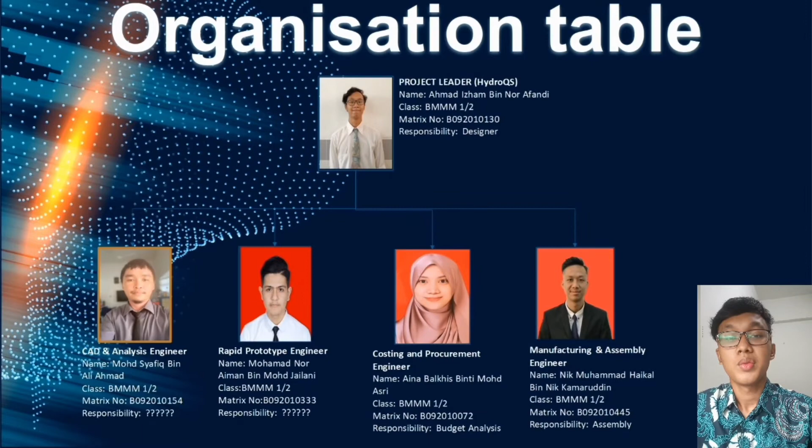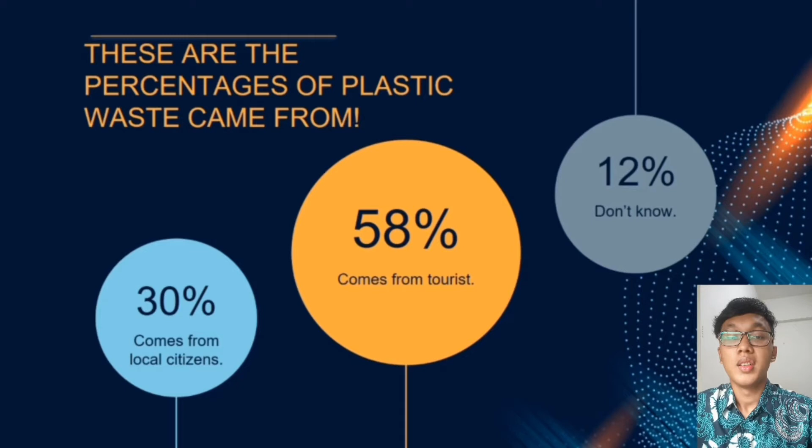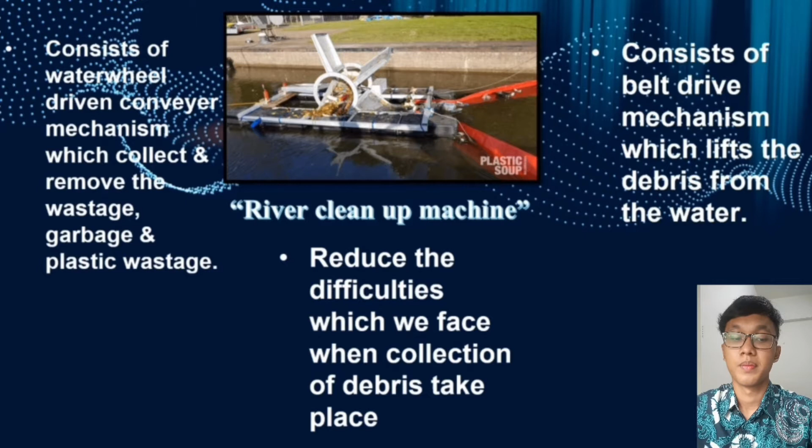Among all these 4 product designs, we have come to a conclusion to choose the best of these 4 designs, and we have chosen river cleaner as our main product. For the next part, which is comparison of these 4 products, we will continue with one of my team members, Nik Muhammad Haikal.

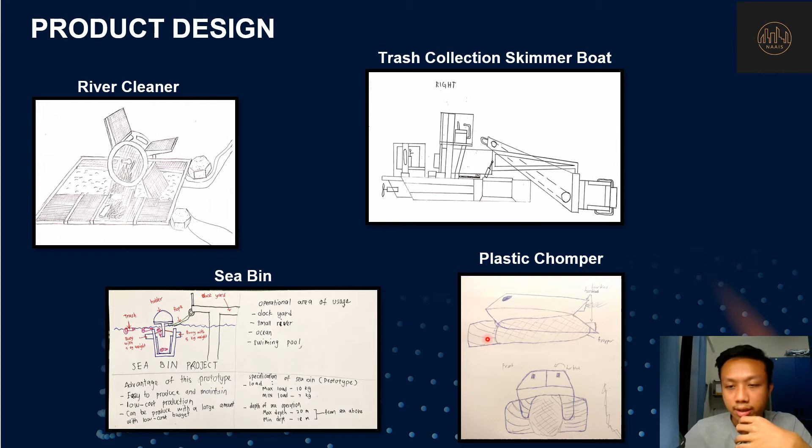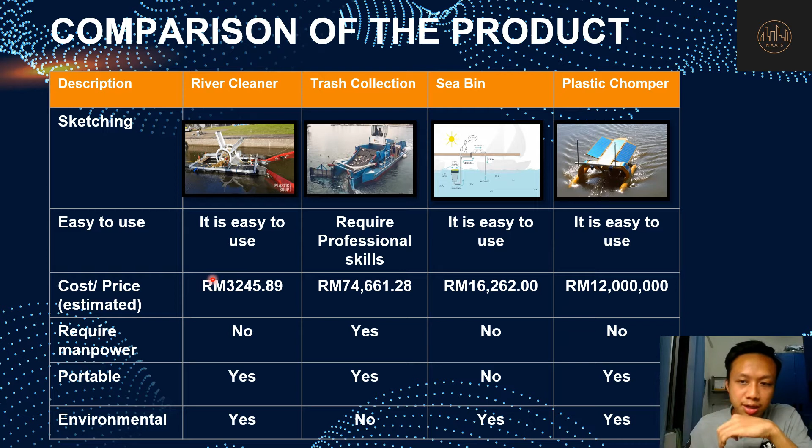For the next part is estimated cost price that we found from Google. For the river cleaner, the price is RM 3,245. For the trash collection, it's RM 74,661. For the sea bin, it's RM 16,262, and the last one, plastic chomper, is RM 12 million.

For the next description is require manpower. For the river cleaner, it's no, trash collection is yes, sea bin is no, plastic chomper is no. For portable: river cleaner is yes, trash collection is yes, sea bin is no, plastic chomper is yes.

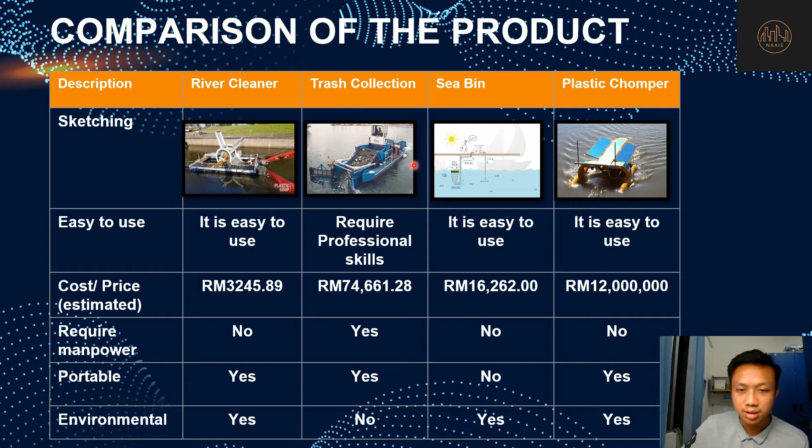For the last description, environmental: river cleaner is yes, trash collection is no, sea bin is yes, and the last one, plastic chomper, is yes.

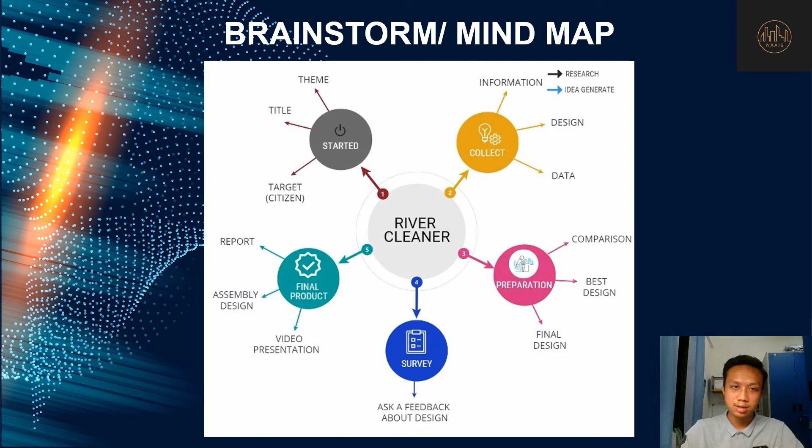For the first one is started, we have theme, title, and target. For the second one is collect, which is how we get the idea, which is information from the internet, design, and data. For the third one is preparation, which is comparison, best design, and final design.

The fourth one is survey, where we ask the survey from the citizens. And the last one is final product, which is we must do a report, video presentation, and assemble design.

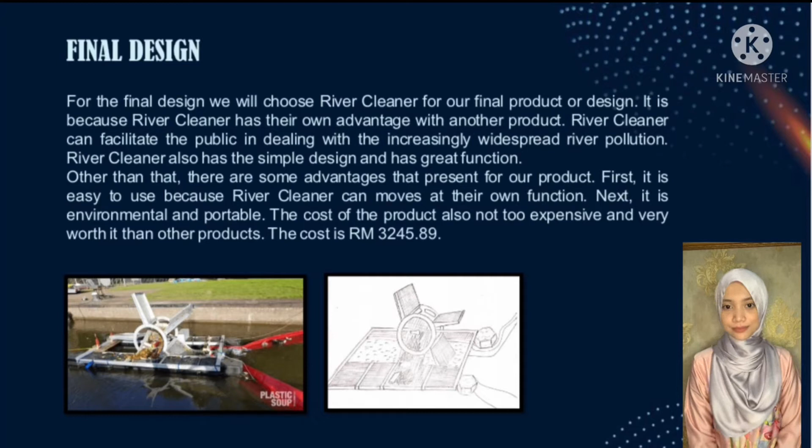In order to ensure the success of this project, we have conducted a survey for society to discover more about the situation at the Melaka River, and the survey included some questions. The first question for the survey asked about the work status.

The pie chart revealed that 71% of respondents had visited the Melaka River, which could be due to the fact that Melaka River is a popular attraction. Meanwhile, 19.4% of those who responded said that they had never visited the Melaka River.

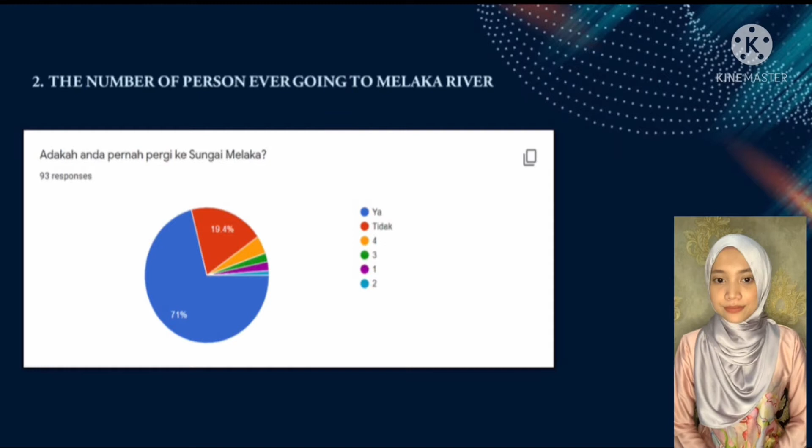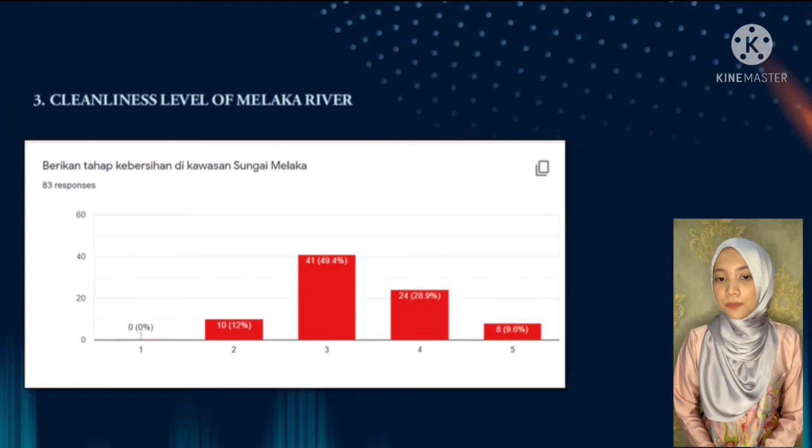The Melaka River's cleanliness is the focus of the next question. Based on the represented graph, we can see that the majority of respondents chose average for Melaka River cleanliness. However, 28.9% of respondents chose scale 4 and 9.6% chose scale 5. This reveals that some people believe that the cleanliness of Melaka River is not up to standard.

The next question is about the level of awareness of water river pollution, and the majority of respondents answered average, as much as 61.7%, with the lowest at 7.4%, and the answer of highest degree of knowledge is as much as 30.9%. It's very worrying that 7.4% of respondents answered that they have a low level of awareness regarding water river pollution.

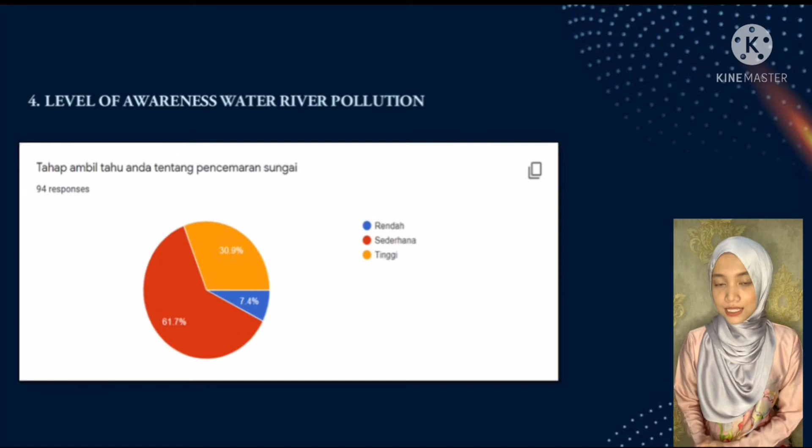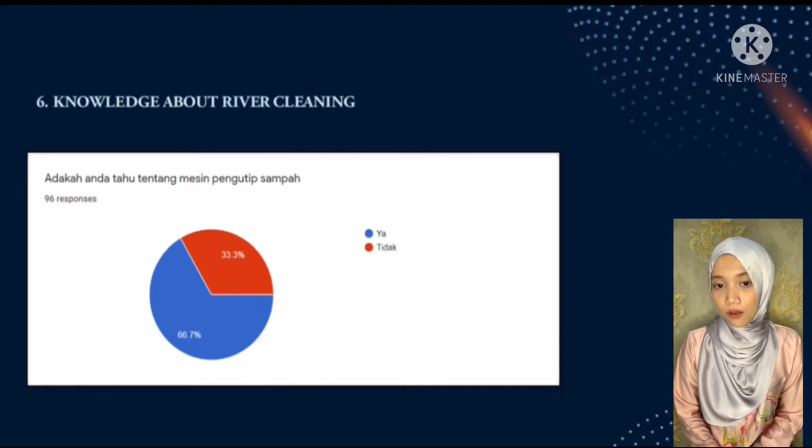Aside from that, the percentage of people who know about the river cleaning machine is 66.7%, which is higher than the answer of 33.3%. We may assume that the majority of respondents are aware of the technology that helps to reduce river water pollution. In response, for the final question, the majority of respondents agreed that our machine can help to reduce river water pollution at the Melaka River.

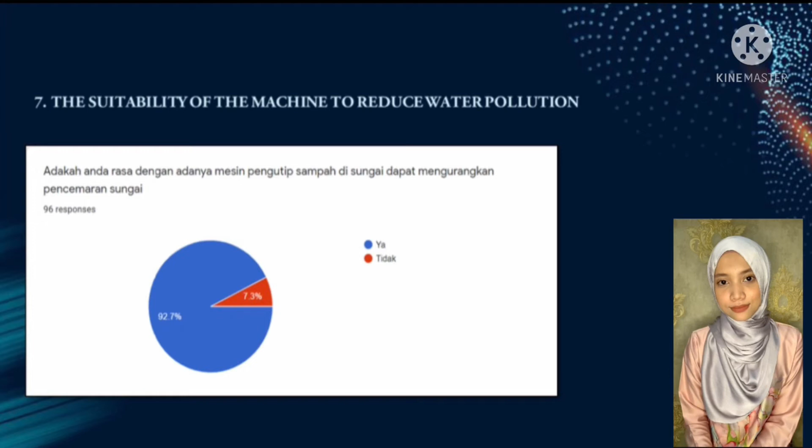For the bill of materials, there are 7 parts that we will be using to make this project a success. The first one is the water wheel, which functions to shovel the plastic out of the water. We only need 1 unit of water wheel, which costs 1,000 ringgit. The second part is the solar panel, which works to generate electricity from sunlight. Only 1 unit of solar panel will be used, which costs 395 ringgit.

Next, the third part, the electric motor, requires only 1 unit worth 316 ringgit. The electric motor's function is to help the water wheel rotate. For the fourth part, the bin requires only 1 unit, which functions to prevent trash from returning into the river. This bin costs only 125 ringgit. For the next part, we will be using 2 units of clipper, which works to keep the base of the river cleaner from splitting. This part costs only 200 ringgit for 1 unit.

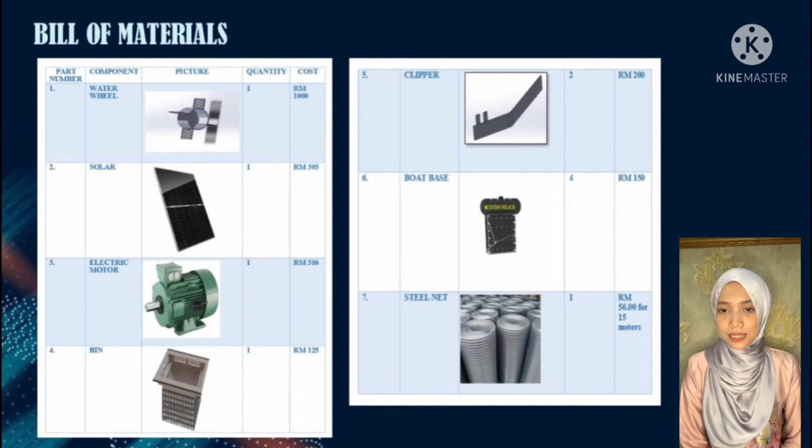Other than that, we also need 4 units of the boat base, as we have to put those around the corners at the base of the river cleaner. 1 unit of this base costs only 150 ringgit. Last but not least is the steel net, which needs nearly 15 meters and costs 56 ringgit. The function of this steel net is to make the waste stick easily.

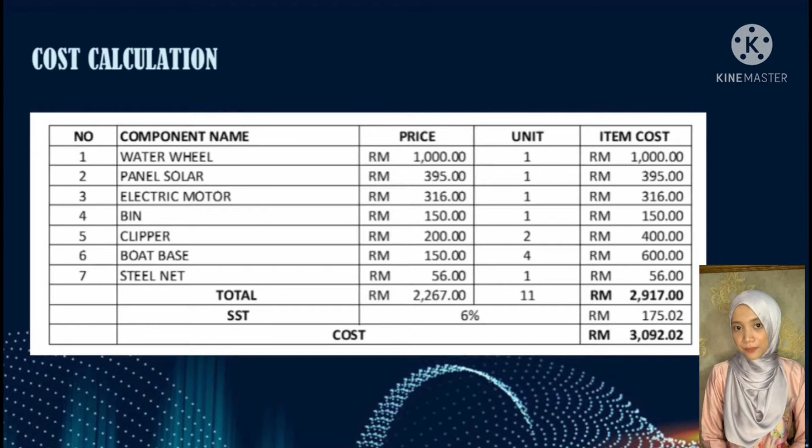As we can see, the slide shows the cost calculation needed for the project's success. We found the total cost by calculating the prices of all the components needed, including taxes. As a result, the estimates show that this river cleaner machine will cost RM 3,092.02 to complete. The machine's overall price proves the estimated price mentioned in the product comparison is correct.

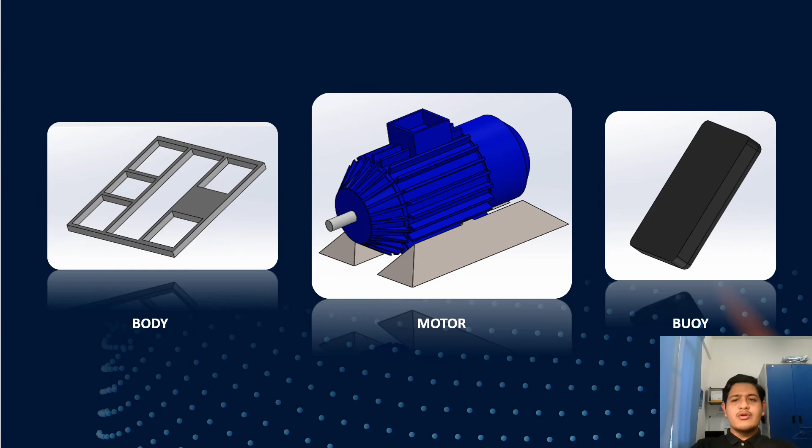Next part is the motor. The motor functions to generate power for the water wheel. Next, the buoy. The function of the buoy is to make the boat float on the water more easily. Next is the clipper. The function of the clipper is to make a way for the waste to get through to the water wheel.

And next is the water wheel. The water wheel will spin 360 degrees, pick up the rubbish, and drop it onto the slide, and lastly into the bin. The water wheel will be powered by the motor. On the right side is the solar panel. The function of the solar panel is to supply electricity to the motor.

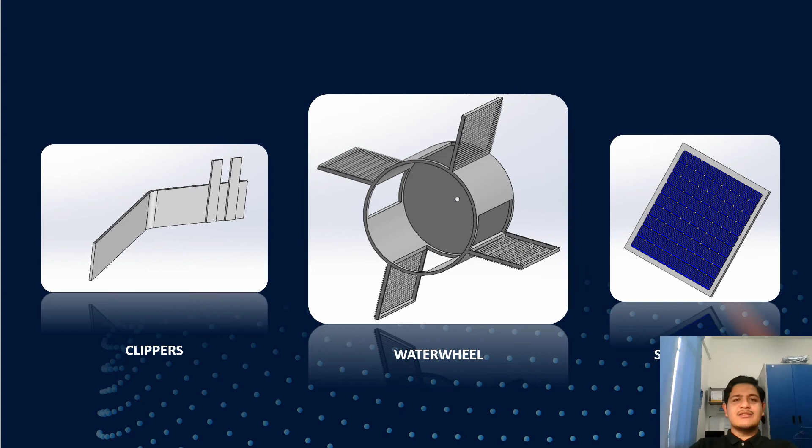So next is the slide. So the slide's function is, after the water wheel picks up the rubbish and drops it, it will drop to the slide, and the rubbish will slide down to the bin. And then next you will see the bin on the right side. So basically the bin is to store the rubbish.

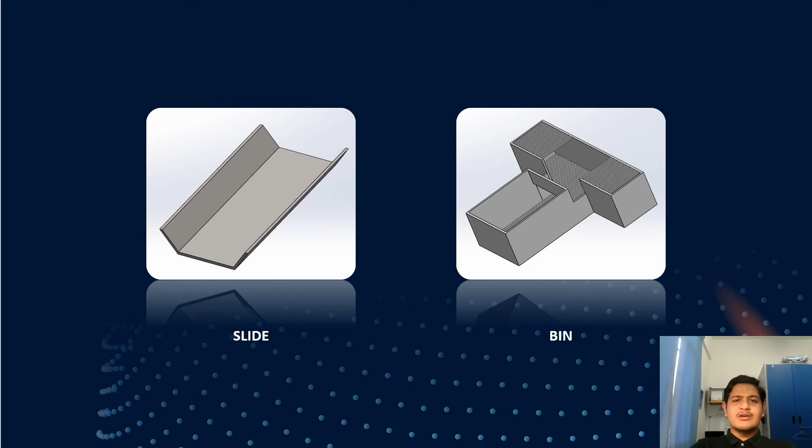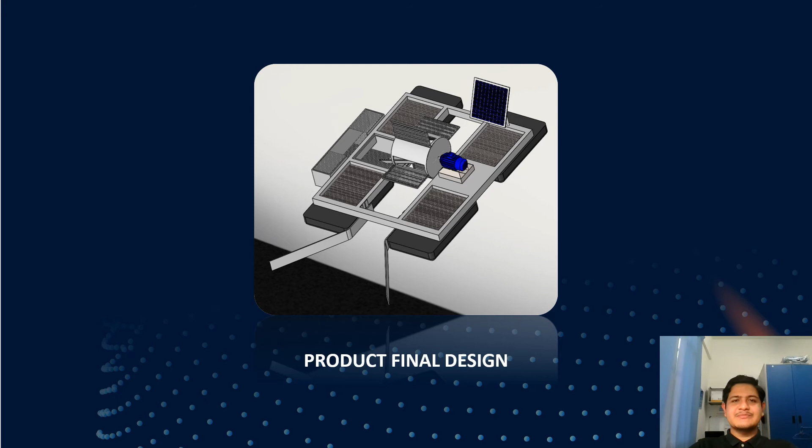Okay, now you see the final product of our river cleaner after the parts are assembled. So this is how our final product looks on the drafting.

So how does the river cleaner work? So first, the waste will make its way through the clipper and go through to the water wheel. So the water wheel will spin 360, generated by the power from the motor. Then the water wheel will pick up the rubbish and drop it to the slide, and the rubbish will slide down to the bin, and that's how it works.

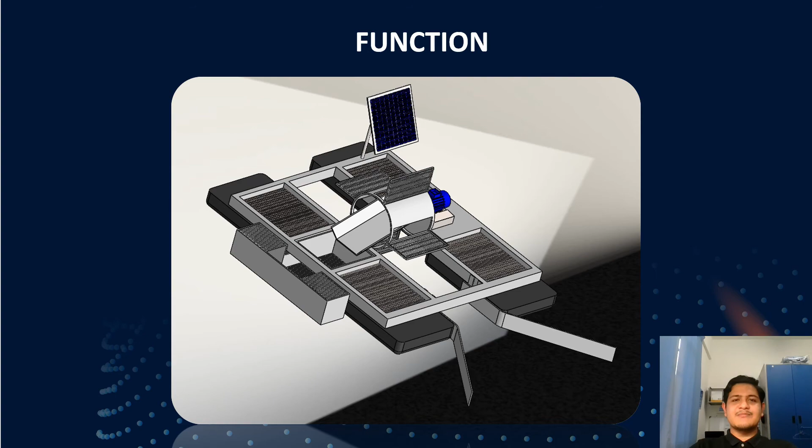Assalamualaikum and selamat sejahtera. Today I'm going to present the last part of this presentation, which is the discussion and the conclusions. My name is Muhammad Shafiq bin Ali Ahmad, and my matric number is B092010 and 154.

The discussion. How the device works. The device we have been making works by collecting floating trash on the river. We place our product on the side of the river because it makes our cleaning process easier. But first, there is a pump working as an absorber to bring the plastic waste towards the roller.

Then we can see there is a big filter spinning continuously in the middle of our machine. The advantage of the big filter is to make the waste collector bigger and make the loader for our waste bigger. After the waste inside the loader is full, we can collect the waste that has been absorbed by our conveyor, and this is the cleaning process. We do it after a period of an hour.

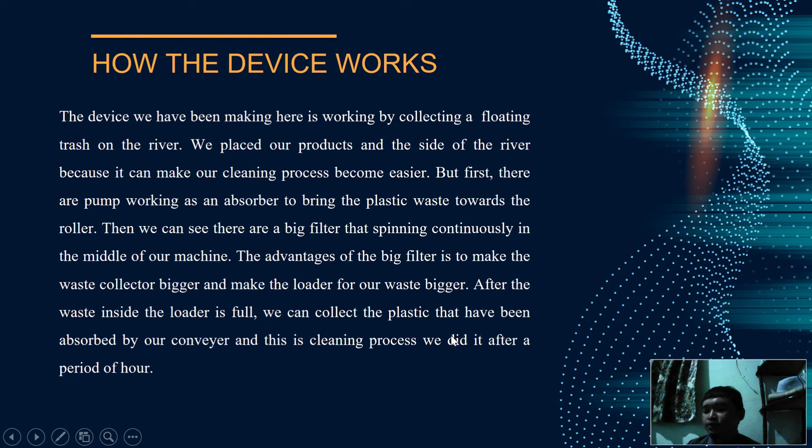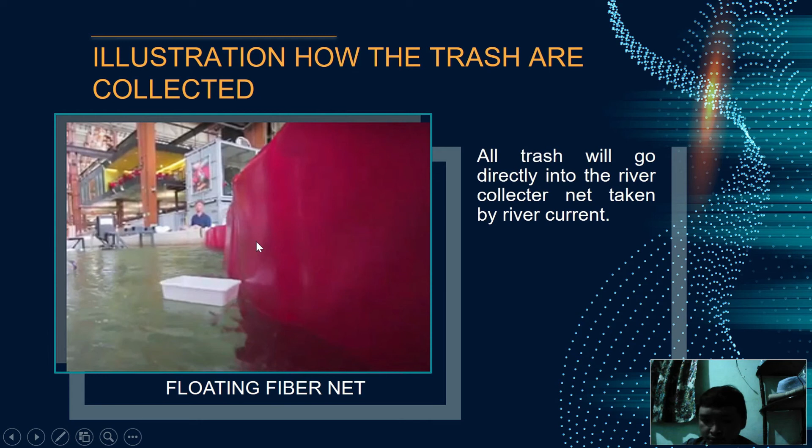Okay, and this is the illustration of how the trash is collected. First, the trash, which is this plastic, is taken by the river current into the fiber net, which is our project. Then after it enters the net, the scoop will catch the trash.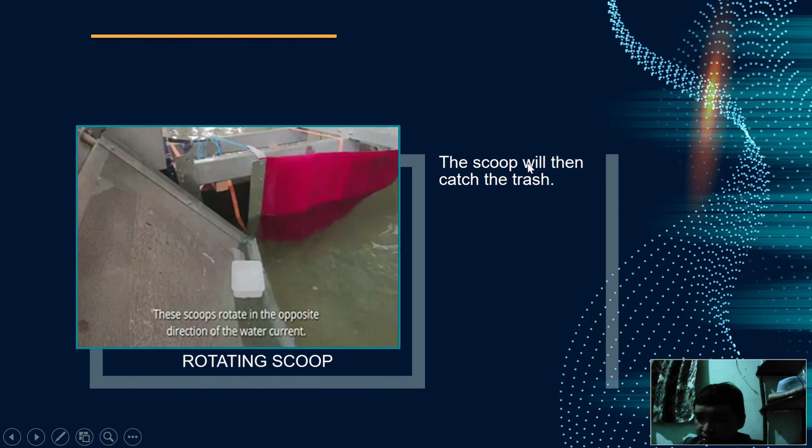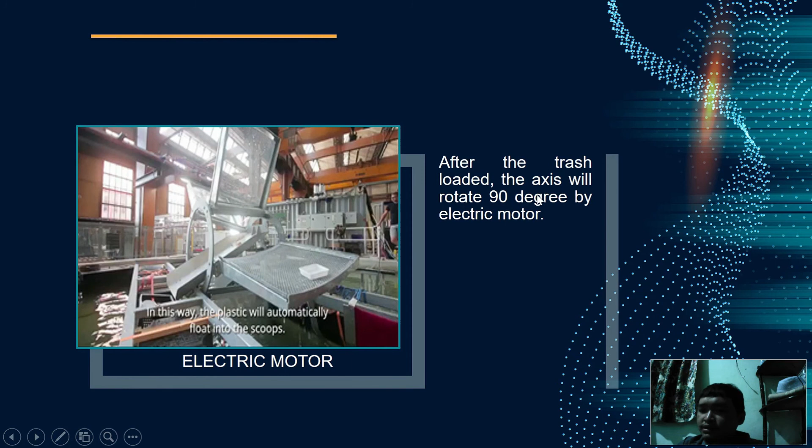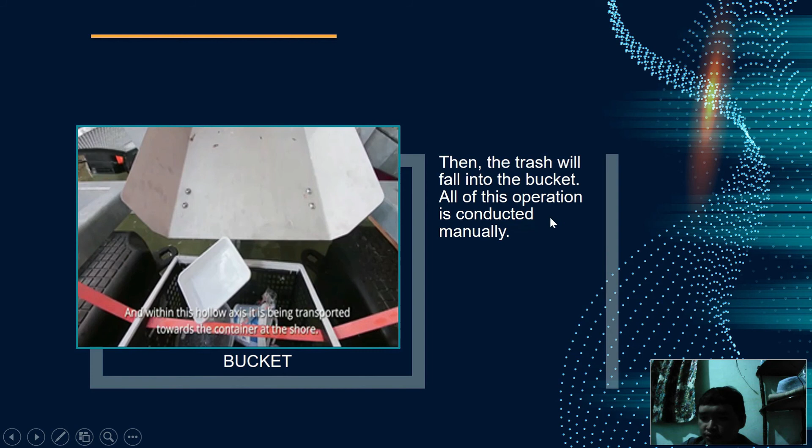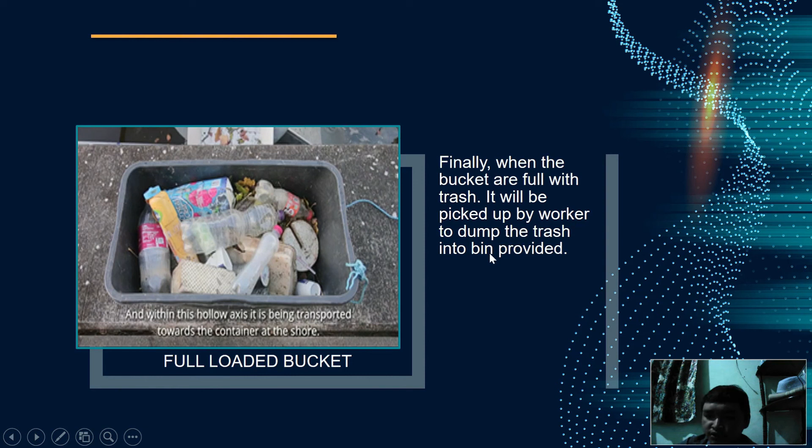After the trash is loaded into the scoop, the axis will rotate 90 degrees by electric motor. Then the trash or plastic will slide into this hollow axis. After that, it will fall into the bucket, and all of these operations are conducted manually. Finally, when the buckets are full with trash, they will be picked up by a worker to dump the trash into a bin provided. Okay, this is the video that we made.

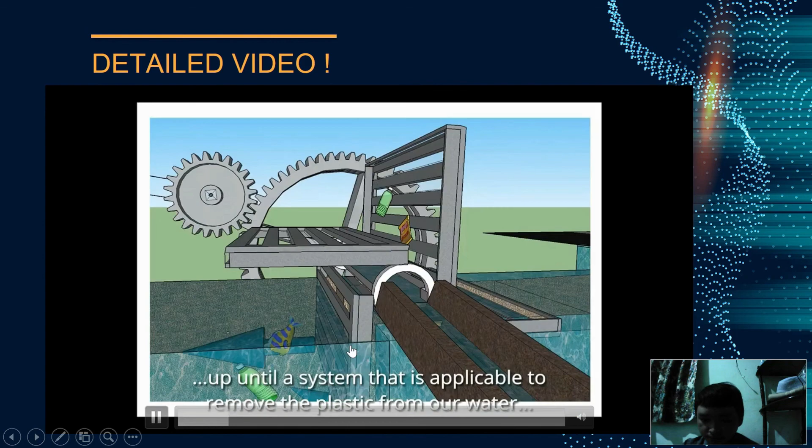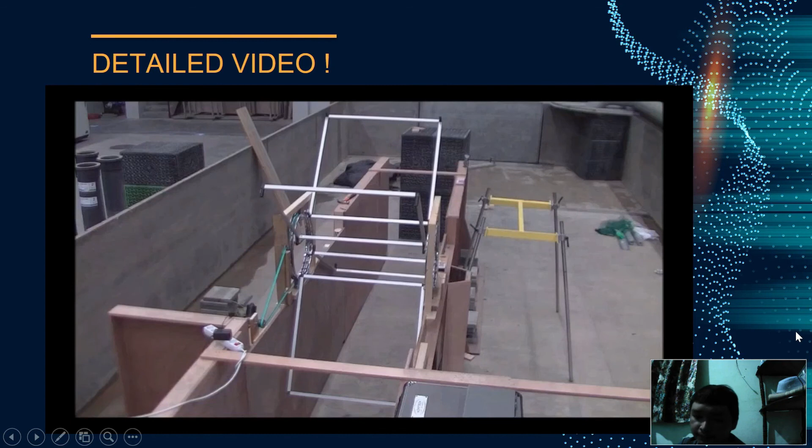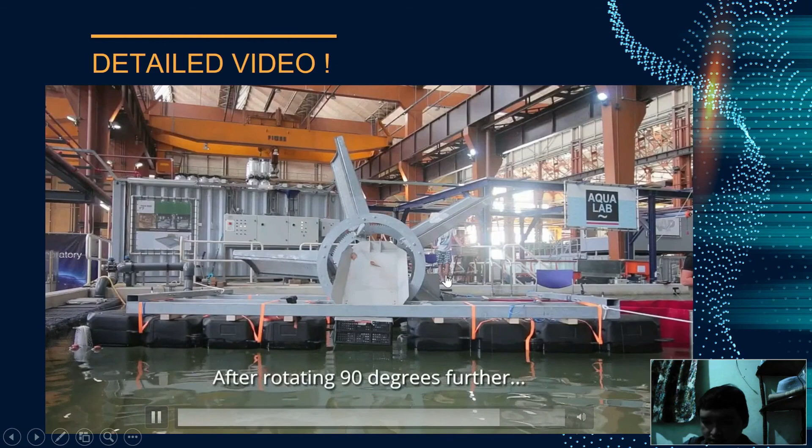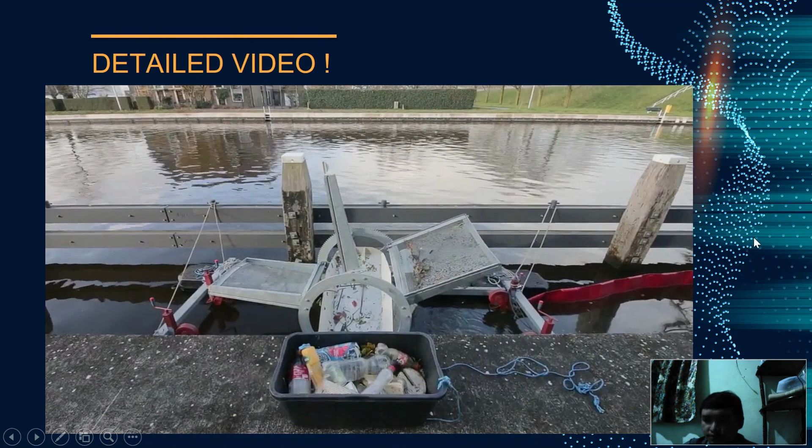In the last years, we developed our system from just a drawing up until a system that is applicable to remove the plastic from our water in a sustainable manner. Our first system is called the Circleaner. The Circleaner consists of one hollow axis and 5 scoops. These scoops rotate in the opposite direction of the water current. And this way, the plastic will automatically float into the scoop. Rotating 90 degrees further, the plastic will slide into the hollow axis. And within this hollow axis, it is being transported towards the container at the shore.

Okay, the conclusions. As the conclusion, the purpose of this research was to identify effective strategies for dealing with river pollution. Through the analysis and improvement of modifications made to this river cleanup project, it has been proven that this project can fulfill the task of collecting trash from the river. From the tests conducted, it can be summarized that this project has passed the requirement standard of the BMMA 2353 subject, which is modeling and computer analysis, to become a prototype project.

Future modification toward collecting trash more efficiently and at low cost could help this project become a more effective river cleaner.